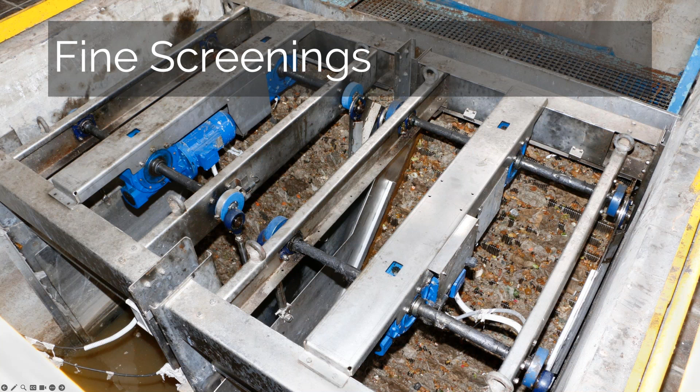We covered different kinds of equipment you can use for that, like what we're showing here, a mechanical step fine screen, but there are other options—wedge wires, perforated plates. We discussed grit removal there too, in simple grit channels, aerated grit chambers, cyclone separators, and the concept of grit washing and disposal.

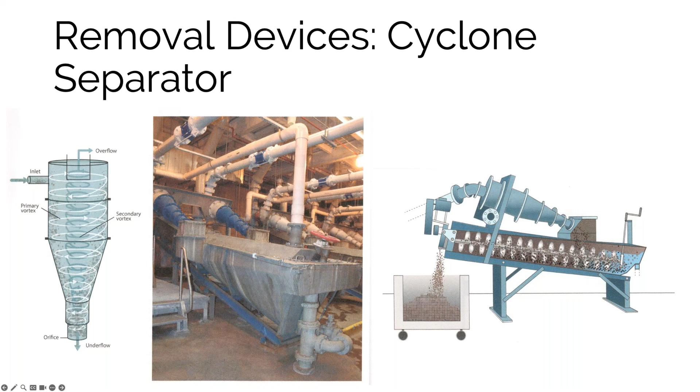I'm pointing these out specifically to let you know that these are not the solids we're looking for, to paraphrase Star Wars. When we're talking about solids handling in the context of wastewater treatment, this is not usually what we're talking about.

Part of the reason for that is the grit and screenings have their own disposal paths. They're typically cleaned—the screenings either go to a landfill or get incinerated. The grit, mostly sand and gravel and other inorganic matter, is also typically washed and sent to a landfill. There are environmental regulations and permit requirements about that, so definitely check your local listings about what you have to do with that.

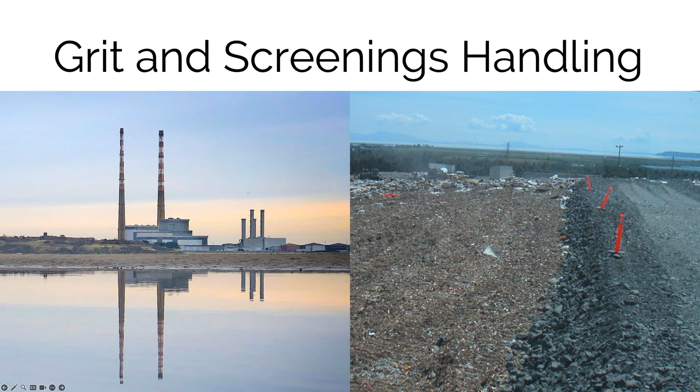If you're unfamiliar with these processes, we did a webinar a couple of months ago about this. The solids we're talking about in the context of solids management for these next two webinars, and generally when we're talking about solids management, are biosolids—basically the sludge.

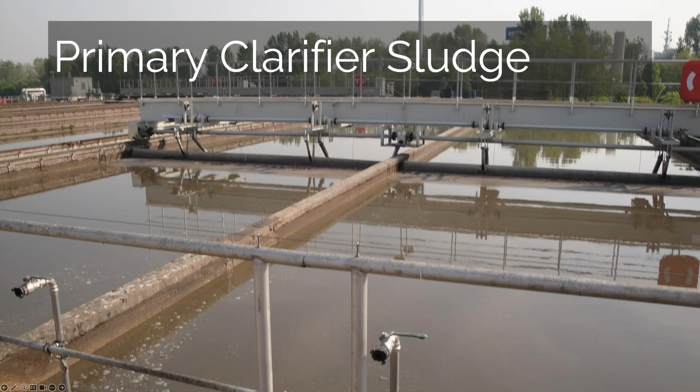We're using the primary clarifiers mostly for TSS removal, removing suspended solids. Tank shapes vary, but the principle is the same—we're essentially using gravity and engineering to get particulates to fall out of suspension so that we can collect them.

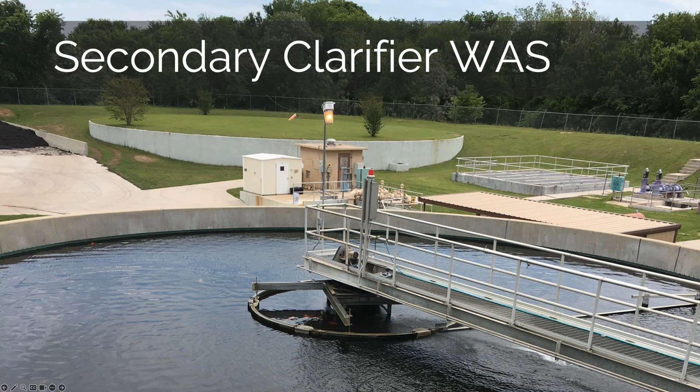Then we're talking about the WAS component of secondary clarifier sludge. Some of it goes back into the activated sludge tank. What we're not using is sludge that we have to deal with, and in this case, it's mostly biological floc and maybe some chemical floc if we're using chemical coagulation processes as well.

I want to point out that the concentration of solids in the WAS is typically much, much lower than primary sludge, but both have to be dealt with, because if you don't remove the sludge, the tanks fill up and your operations will cease to work efficiently.

So now that we know which solids we're talking about and where they're coming from, let's talk about where they're going. Assuming everything is working correctly and to spec in your system, most of the suspended solids and dissolved organic solids are going to be taken out of your effluent by your processes before it gets discharged into the environment. Particularly for large systems, that's a lot of solids that build up and have to be dealt with.

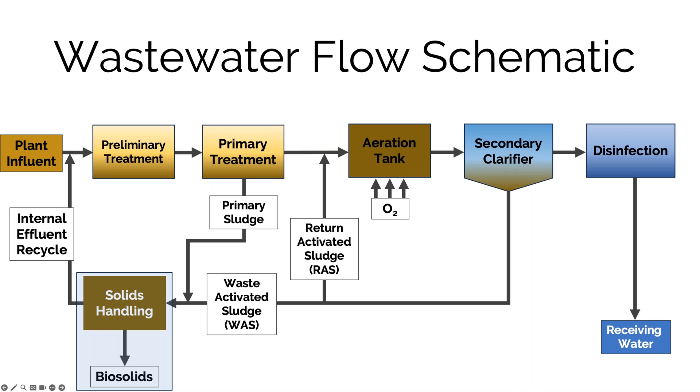Then it's going to move on to digestion, where we're going to do some more biological treatment and produce some biogas, which we may actually use in our processes. From there, it goes to dewatering. The effluent from that dewatering process typically gets recycled back into the plant for other uses, and then the solids that are left over get disposed of one way or another. We're going to leave that part of the equation for our next session.

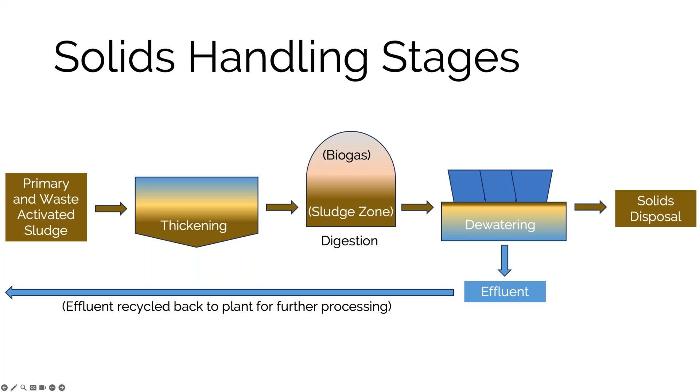So we've got 4 basic stages to think about when we're talking about solids handling. There's thickening, which is essentially reducing the volume of the sludge. There's digestion, which is further breakdown of the sludge with microorganisms, essentially a continuation of what's going on in activated sludge, but with different goals sometimes. Then there's the dewatering process after digestion, where we're removing more water from the solids, and ultimately we've got disposal or reuse, which is the end of the line for the sludge. There's a lot of different ways it can be dealt with.

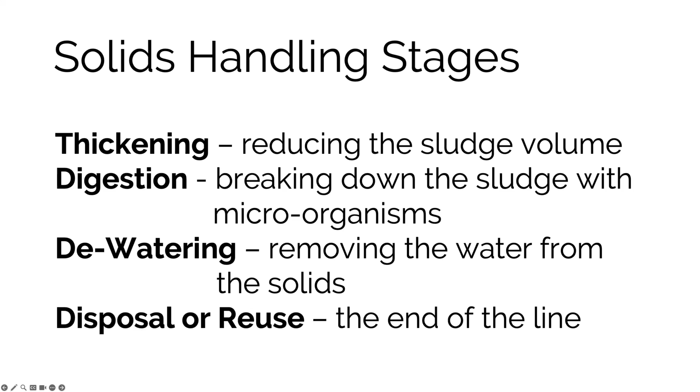There are many different options in each of these categories, but these 2 categories have a lot of similarities. Thickening and dewatering are essentially about volume reduction, using mechanical processes to do that. That's why we're focusing on what are essentially parts 1 and 3 of a 4-part process today, and leaving digestion and reuse for tomorrow, the November 9th session.

So let's start talking about thickening, and it's just what it sounds like. It's reducing the volume of sludge that you're going to store in a digester. This is typically step 1 after that initial solid separation process going on in our primary and secondary tanks. There are many different ways it can be done: gravity thickeners, centrifuges, dissolved air flotation, various kinds of belts and presses. But before we get into the mechanics of how we do this, I want to talk a little bit about the why.

As I said, this is a little bit more of a conceptual webinar today. So why is thickening necessary? Well, basically because sludge is mostly water. Primary sludge is typically somewhere between 95 and 97% water and only 3 to 5% solids. So if you do the math there, every pound of primary sludge is suspended in somewhere between 20 and 30 pounds of water.

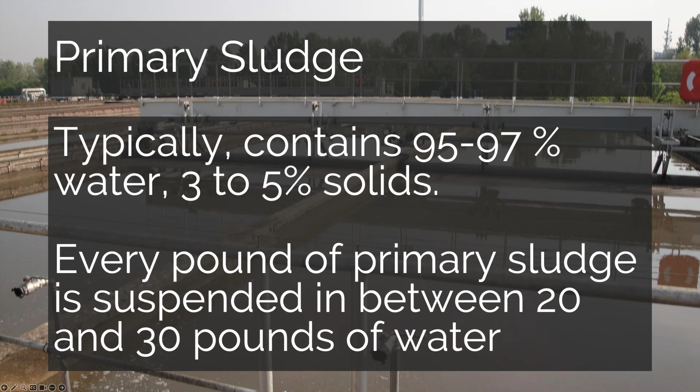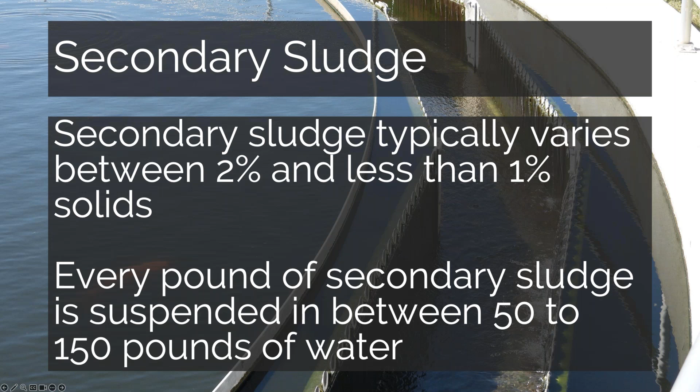On the secondary sludge, the ratios are even worse. You've got anywhere from 2% to significantly less than 1% solids in your secondary sludge. At the extreme end of that, you could have a pound of secondary sludge solids suspended in 150 pounds, or roughly 18 gallons of water. So if you didn't remove all of that water, the digestion equipment in stage 2 of your solids handling process would have to be at least larger, if not huge.

So one of the main reasons we go through these thickening processes is basically just to reduce the mass of the stuff we have to deal with in the later stages. There's a lot of advantages to this. By increasing the concentration and reducing the water, we can improve digester performance. If we have to retrofit a digester to an existing system, the smaller we can make it, the less it's going to cost. And another aspect that's often overlooked is that digesters are biological processes, and depending on the time of year and where you're located in the country, you might have to heat that digester to get it to work efficiently. Again, the smaller it is, the cheaper those heating costs are going to be.

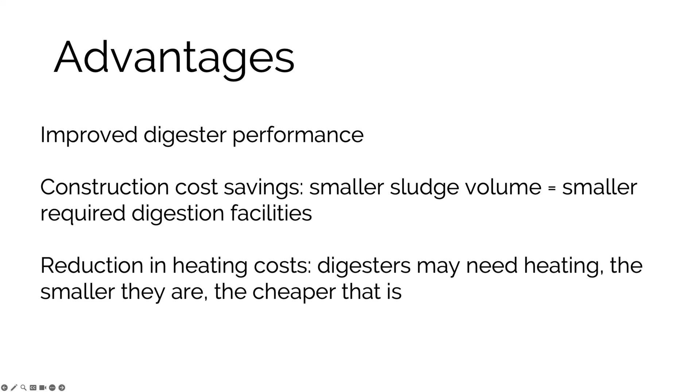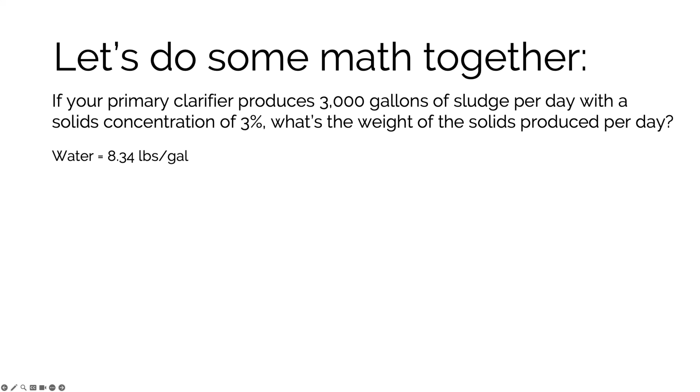So that's sort of some conceptual side things. I'm going to walk you through a little bit of math to really nail home what's going on here. If we've got a primary clarifier with 3,000 gallons of sludge producing a sludge concentration of 3%, we can figure out the weight of the solids pretty easily using a fairly simple formula: basically taking the sludge volume, multiplying it by the known weight per gallon of water, and then multiplying that by the solids concentration.

8.34 pounds per gallon is close enough for us to use in this situation. If we run the math through, double checking to make sure all our units cancel out, our 3,000 gallons of sludge is 751 pounds of dry solid sludge per day, which is pretty significant, but that's suspended in a relatively large volume of water.

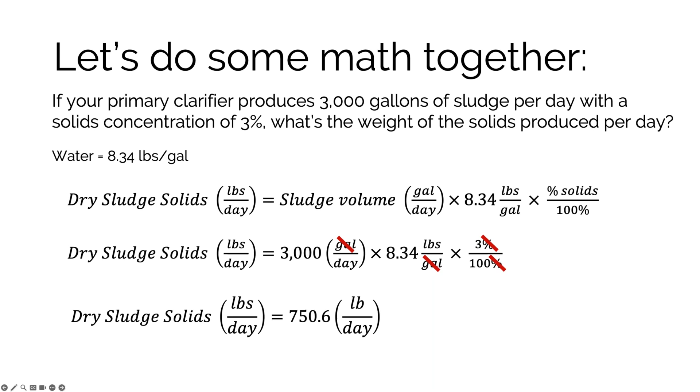If we wanted to up that concentration, let's say to 5%, so we're dealing with the same amount of solids, we're just trying to concentrate it, what does that do to our sludge volume? Well, we can use the exact same formula, just rearranging it with our known weight and kind of work backwards to figure out what the volume would be.

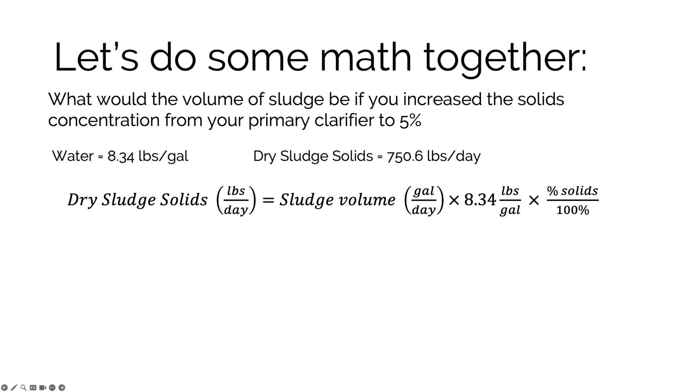So we take our same formula, we plug in our knowns, and in this case, we're looking for sludge volume instead of the weight of the dry solids. We work our problem backwards, rearrange it, and we've got our same weight of solids per day that we're producing, but in a higher concentration, and our 3,000 gallons has been reduced to 1,800 gallons per day.

So we've kind of done mathematically here what we talked about earlier. And what this shows is that small increases in sludge concentration can result in relatively large decreases in sludge volume, which is what we're looking for in our next stage of sludge treatment. So: small increase in solids concentration percentage, significant decrease in sludge volume.

You may be able to get the appropriate concentration of solids in your primary clarifier. You're probably not in your secondary clarifier, but you have to maintain each of those processes' operational parameters within the parameters they're designed for. So you may want thicker sludge coming out of there, but it might not be operationally possible. That's why you might need a thickener as an intermediate step between those sludge production processes and the digestion processes. So again, we just did mathematically what's going on in the thickening process, increasing concentration.

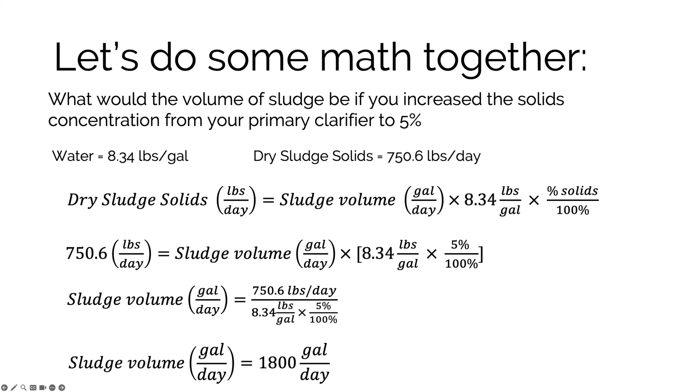So now that we know sort of the what and the why, let's get into the how. I'm going to start with gravity thickeners because they're one of the more common versions of these we see, and also because it uses a process you should be very familiar with if you were at earlier sessions, because it uses a sedimentation process.

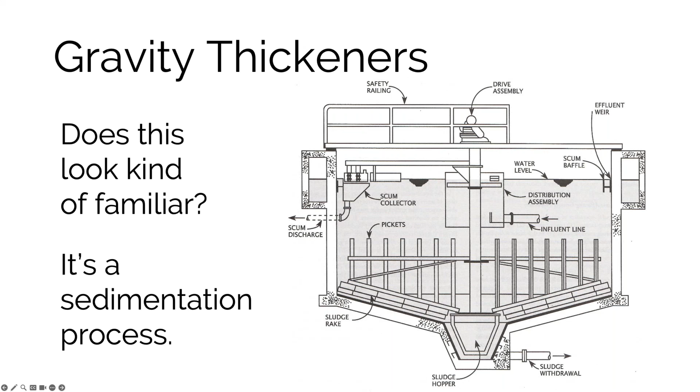It's essentially a different kind of clarifier with some slight tweaks, operated with slightly different operational parameters. It works on sedimentation. We did an entire webinar on sedimentation processes that I highly recommend you take a look at. But essentially what we're doing is slowing the effluent velocity down, using flocculants and gravity to settle those solids out, using clever engineering.

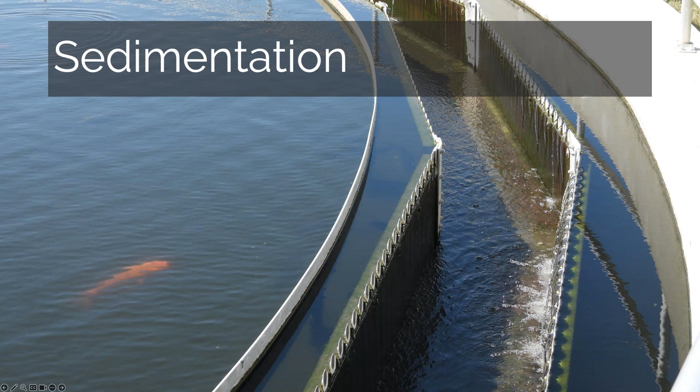And if you weren't at the last webinar, I kind of think of flocculated settling as an analogy to snowfall. If you think about a snowstorm up high, the flakes are separate, they fall, they clump together, they get bigger, they fall faster, eventually they land on the ground, and as they pile up, they start to act as a unit because they pack together and compress the snow beneath it. So that's essentially what's going on, on a conceptual basis, inside a gravity thickener. If you want to see what one of these things looks like and you've got a snow globe at home, shake it up and take a look at what happens, and that'll give you a good idea.

The components of a gravity thickener are really similar to what you see in another kind of clarifier. You've got an inlet distributor assembly, typically in the center. Influent gets pumped in. You've got a baffle that slows it down, that extends down into the surface of the water so that the solids start moving in the right direction. You've got a sludge rake on the bottom that's slowly rotating around, moving sludge that deposits on the bottom of the thickener into a hopper where it can be withdrawn.

Those rakes typically have pickets on them, so little fingers sticking up. Those are there for a couple of reasons. It helps with the flocculation because as it's slowly stirring, it's letting those flocs bang together and form larger flocs. It also helps release trapped gases that may develop in the sludge. Gases developing in the sludge are going to counteract settling. In bad cases, they can actually cause the sludge blanket to rise up in the system, which is the exact opposite of what you want to do.

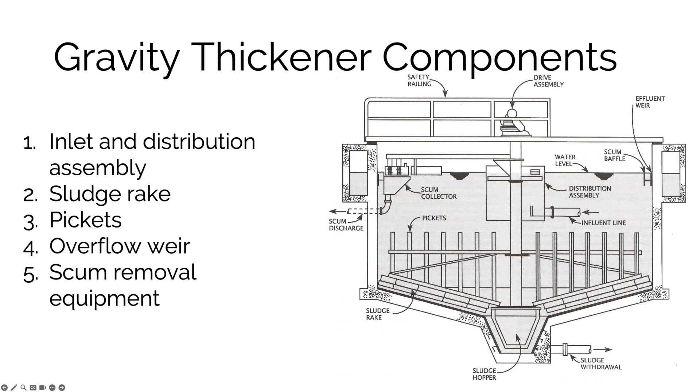Again, mostly on a conceptual level, sludge type is going to matter. The age of this feed sludge will matter. The temperature of the sludge that you're dealing with will matter. Remember when we talked about sedimentation, there are seasonal changes you have to deal with. Obviously, the sludge blanket depth is going to impact performance—how much solids you're holding in the tank for how long, which is essentially your solids detention time, but also hydraulic detention time and hydraulic loading are also going to play a factor.

We covered how to calculate detention time and hydraulic loading in a math-specific webinar earlier in the series, so I'm not going to go over those formulas today, but just recognize that these, like your other clarifiers, are parameters that you have to understand and know how to work with. If you're not familiar with how to calculate those, I highly recommend checking out the earlier webinar. But again, these are also all covered in your state and other resources available.

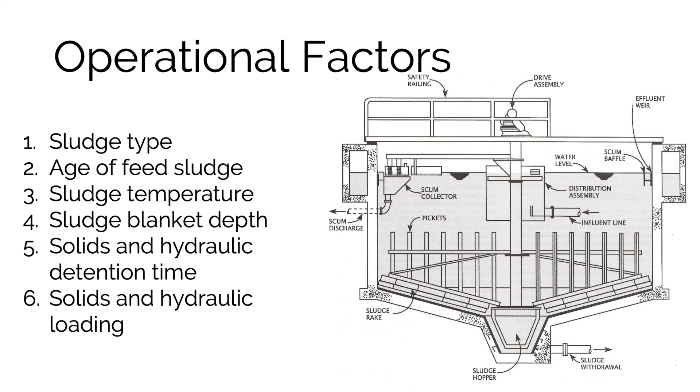So let's talk a little bit about sludge. Gravity thickening works best with primary sludge, typically because it has relatively high concentrations of solids in there. Fresh sludge typically can be concentrated to the highest degree, and part of the reason for that is that old sludge can get septic. If it gets septic, those anaerobic and facultative bacteria that may be living in there start to strip out oxygen and produce things like methane, hydrogen sulfide, and carbon dioxide, which form bubbles that get trapped in the blanket because it's semi-solid, and can lift some or all of it up.

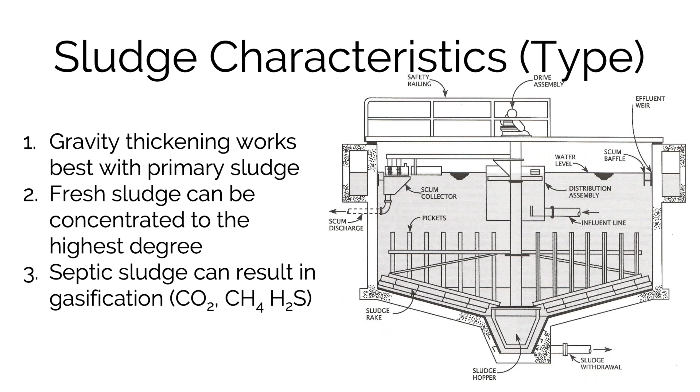You can theoretically use gravity settling for secondary sludge, but it settles much slower because it's a lot less dense. Another reason it settles slower is that the secondary sludge solids are mostly biosolids, so it's microbes, and they are 85 to 90% water, and that water is trapped inside the cells. So it makes the settling go a lot slower, and those solids in secondary clarification processes are also typically a lot finer, so they settle slower.

This is why, as we'll see in a little bit, particularly in smaller plants, quite often these two streams are merged together. So your primary sludge and your WAS get merged together to go into a single gravity separator, one that cuts down the cost of having two, but also makes the secondary sludge settling work better.

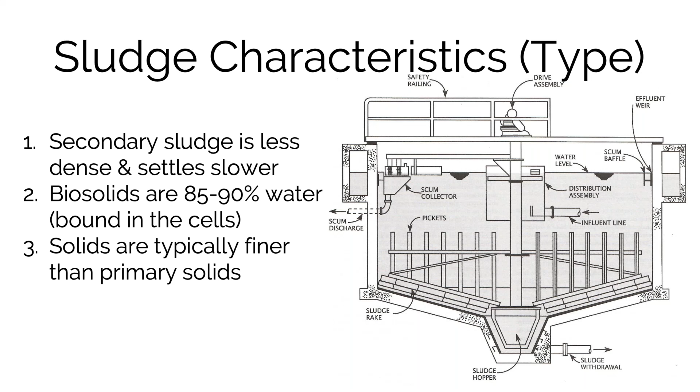Sludge age is also an issue, so that's going to be related to your detention time—how long it's been sitting in there, how old it was when it came out of the primary and secondary clarifiers to begin with. Again, if you hold the sludge too long, what dissolved oxygen is in there might get depleted. You can actually run into situations where you've got denitrification going on in the bottom of your tank, and a little bit might be okay, but a lot, again, can result in gasification, bubbles forming, and raising your sludge blanket.

Another issue that you might run into is an abundance of filamentous organisms. We talked about those in the activated sludge webinar. Old sludge tends to have more of them in there.

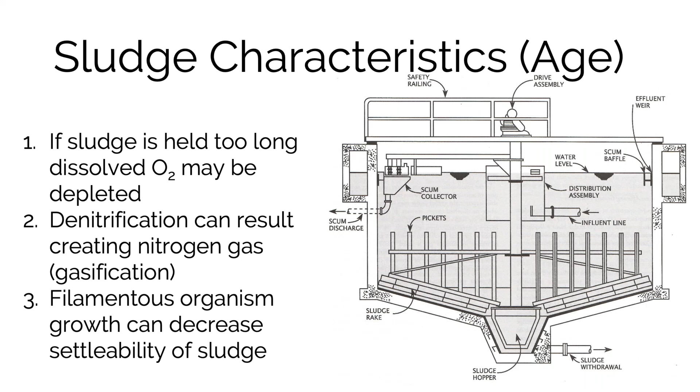Temperature, again, is another important factor to think about because there's still biological activity going on in here, and as sludge temperature rises, so does the biological activity, which is just another way of talking about some of the things we've already covered—gasification and sludge rising. This is why, typically, you will have higher sludge removal rates out of your thickeners in the summer versus the winter, because you're basically offsetting those increases and decreases in biological activity going on at the bottom.

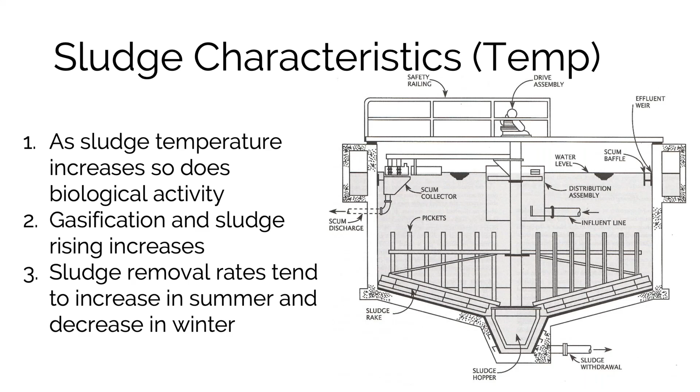So there are a lot of different designs of these. I'm just going to give you some general operational guidelines. There are many more factors to think about besides loading and thickening percentages. There are manuals like the SAC state books I talked about, and your state guides, that will have the required information, and your operation manuals for your particular system will tell you the ranges you're supposed to be working in. But typically, primary sludge solids loading rates are somewhere in the 20 to 30 pounds per day per square foot range, and the output sludge is about 8 to 10% solids. Activated sludge, on the other hand, has much lower loading rates and consequently much lower thickened sludge solids percentages. And that kind of makes sense if you think about it.

Most of your solids are coming out in primary treatment. A smaller volume of solids is coming out in that activated sludge process in your secondary clarifiers.

We talked about trickling filters during our fixed film webinar, so if you need some information about those, check that out. Trickling filters also produce biosolids that have to be dealt with, and they fall somewhere in between primary sludge and activated sludge, both in terms of operational loading rates and the thickened sludge that comes out.

As I mentioned earlier, quite often WAS streams and primary streams are combined into a single thickener, and you end up with combined sludge loading rates and thickening percentages, solids percentages, somewhere in between primary sludge and activated sludge by themselves.

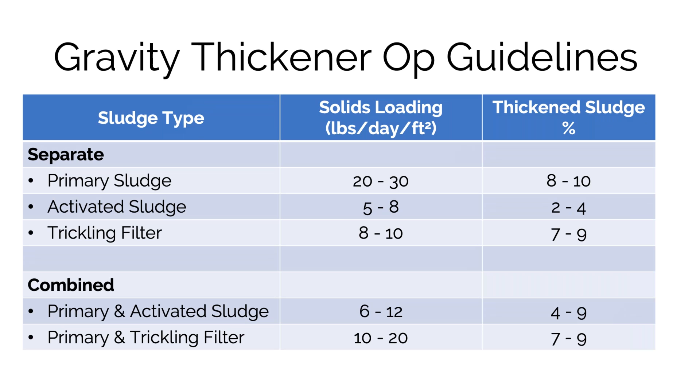Another thing you'll have to pay attention to is hydraulic loading rates. I'm not going to go over the calculation, we covered that in an earlier webinar, but I'll give you some typical ranges. Hydraulic loading rates in gallons per day per square foot for primary sludge are in the 400 to 800 range, activated sludge is typically about a quarter of that, and combined streams sort of fall in the middle.

You may have to mess with the hydraulic loading rates to make your system operate the way you want to. One of the ways that gets done is by blending secondary effluent with the sludge that's going into the thickener.

In addition to increasing the loading rates, this can also help prevent septic conditions and odors from developing, because you're essentially adding cleaner, more oxygenated water in there.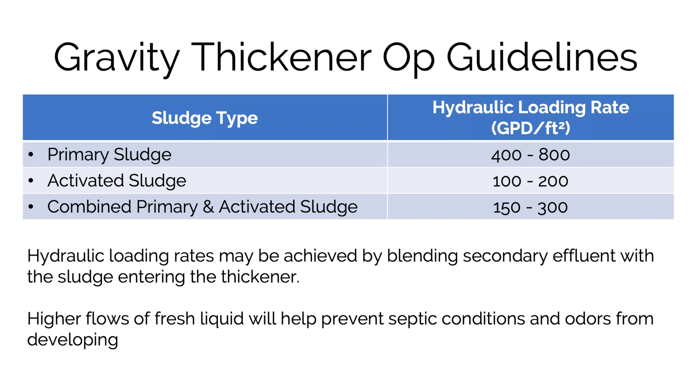So with that, we're going to get to our first poll question. It's a bit of a conceptual question based on the things I've been talking about. Basically, if you've got a gravity thickener and you're experiencing gasification and sludge rising, which of the following options might help correct that? Increasing sludge wasting to lower the sludge blanket depth, decreasing the sludge wasting to increase the sludge blanket depth, increasing secondary effluent recirculation into the thickener, or decreasing secondary effluent recirculation into the thickener. I'll point out that there are two right answers here.

We'll give you about a minute to think this out, and then we'll walk through what the correct answers are and how we get there. It looks like most people have their answers in, so I'll give everyone about 10 more seconds and then I'll close this poll.

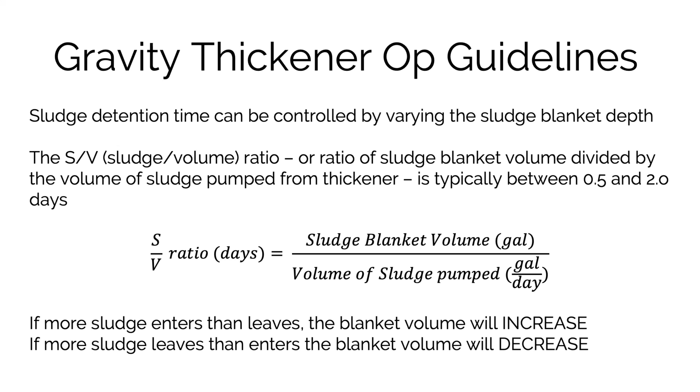So we've got our second little poll question here.

Let's do the setup for you. We've got a sludge blanket volume of 28,200 gallons. Sludge flow into the thickener is 100 GPM at 3%. Sludge flow out of the thickener is 40 GPM at 7% concentration. What's the SV ratio? Everything you need except for a simple conversion factor is there.

Remember, your SV ratio is in days and your flow is in minutes, so you're going to have to convert that. So take about a minute and see if you can come up with an SV ratio for this particular problem. I'll see you on the other side.

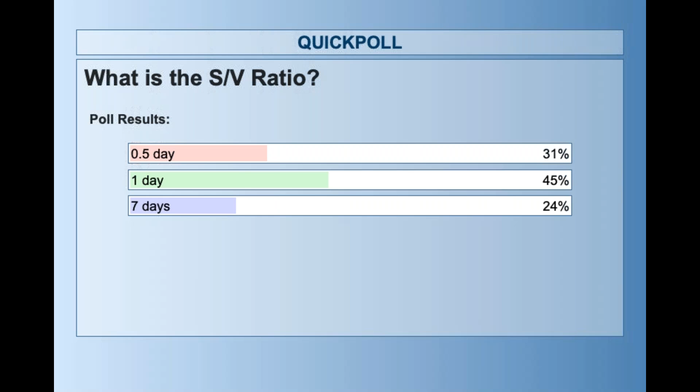All right, the answer here is actually half of a day. I will walk you through the math here to explain this. And I will point out that I did put a couple of red herrings in here just to make your life a little more difficult, but I'm trying to make a point with this.

To calculate this, what we need to know is the sludge blanket volume, which I've given you as 28,200 gallons. Then we have to figure out the volume of sludge that's getting pumped per day. What's going out of the thickener is 40 GPM, which we have to convert into gallons per day. So we use our 1440 minutes per day factor to convert that, which basically ends up with 28,200 over 57,600, which gives us half a day.

So I wanted to point out a couple of things. One, I simplified part of this problem and made part of it more complicated than it needed to be, because this is often the kind of thing you might see on a test. Sludge blanket volume, again, I gave you here on an op cert test, but you're often going to have to calculate that. They'll tell you what the sludge depth is, and then you'll have to use your pi r squared or pi over 4 times diameter squared formulas to figure that volume out.

The other thing to point out is that in the context of this particular question, concentration does not matter. So if you picked one, you probably actually flipped the ratio upside down—instead of dividing the volume of the blanket by the volume of sludge, you flipped that equation and ended up getting 1. So make sure you're putting the right things in the right places. If you picked 7, you probably multiplied the concentration of the output into the bottom line, which threw you off.

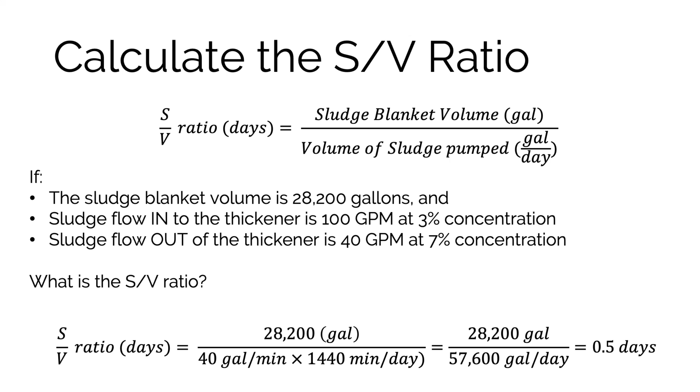This is again one of those parameters that you're going to use, and it's going to vary based on the design. If you have one of these systems, it's really good to understand what your engineers decided your system parameter should be, what range it's supposed to be in, so you can dial that in accordingly. Another parameter you're often going to look at with thickeners, similar to other kinds of clarifiers, is removal efficiency.

So we've got another problem here, and in this case, the concentration does matter. This is a typical efficiency formula where you're looking at, in this case, not the sludge going out, but the influent in, so the sludge coming in and the effluent out.

So in this case, we've got 30 GPM going into a thickener at a 3% concentration, which is 30,000 milligrams per liter, and an effluent flow out of the thickener at 0.15% concentration, which is 1,500 milligrams per liter. Take those numbers, throw them into that formula, and see if you can come up with the removal efficiency for this set of particular parameters. Kristen, if you want to throw the answers up there.

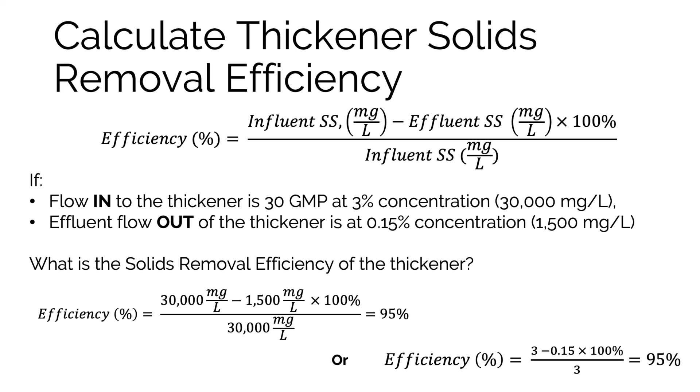Other thickening methods that typically get used are DAF, which is dissolved air flotation, centrifuges, belt filtration, and drums.

I'm going to start with flotation because it's kind of the exact opposite of the gravity process we talked about just now. In gravity thickening, we're using physics to push the solids to the bottom of the tank where we can collect them. In a flotation process, we're using physics to push the solids to the top of the tank. It's kind of a neat process. This is a cross section of what a DAF unit typically looks like.

You'll have sludge and polymer coming in at one end, usually at the bottom, and it gets mixed together and released into the basin. Part of that sludge feed is air bubbles, which causes the sludge to cling to the outside edge of the bubbles and rise up, where this mechanism at the top, which is essentially a bunch of scraper blades, rotates and slowly moves the sludge off the top to one end where it can be discharged, while the clarified effluent, which you can see going out the bottom under a weir, goes out the other end.

So it's the same net effect as gravity separation, but we're working in the opposite direction. Although, of course, some sludge is always going to settle to the bottom, so every DAF unit I've ever seen or read about has a bottom sludge collector for the little bit that ends up down there. And I do want to point out that they can be round like regular clarifiers, or they can be rectangular like what I'm showing you here.

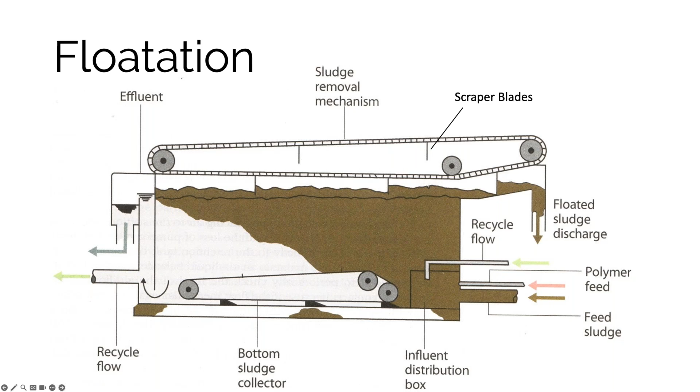Flotation is used in a lot of different industries: wastewater, food manufacturing, mining, all sorts of things, and there's a lot of different ways it can be done. You can use dispersed air flotation, where you're generating bubbles using mixers or diffused aerators. You can use biological flotation, which is essentially just letting the gases that biological activity creates float the solids. You can use dissolved air vacuum flotation, where you're essentially aerating the effluent at atmospheric pressure and then putting it under a vacuum, which causes bubbles to get released. Or you can use the more typical process used in wastewater, which is dissolved air pressure flotation, where you're essentially aerating the effluent under pressure and releasing it to atmospheric pressure.

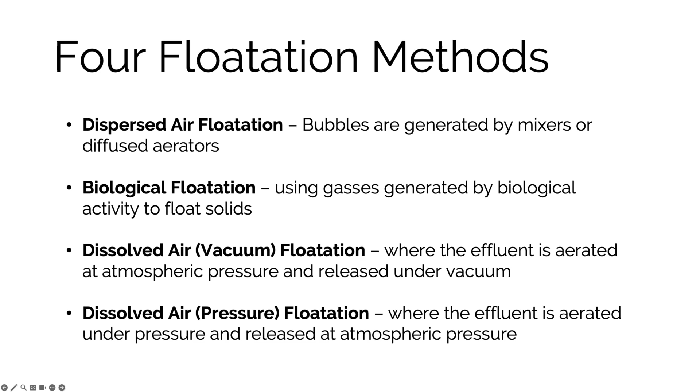And the mechanism that's at play here, every one of us has seen, even if you don't know it. It's exactly what happens when you open up a can of soda. The liquid inside the soda can has gas dissolved in it, and it's under pressure.

And when you crack the seal, you're basically exposing it to atmospheric pressure, and the CO2 that's dissolved in the liquid effervesces out. It basically forms bubbles and comes out because of that pressure change. And so that resulting foam you get is what happens when a liquid that's saturated with gas under pressure is released to atmospheric pressure.

It's also somewhat similar to what you see divers have to deal with. So the deeper they go, the more nitrogen gas in their bloodstream gets dissolved into the bloodstream. And if they ascend very, very quickly, so if the pressure changes very quickly, that dissolved nitrogen gas actually bubbles out in your blood and causes the bends.

Same physics going on, but in the case of wastewater treatment, we're essentially using the creation of those bubbles to float solids to the surface, because the solids stick to the outside surface of the bubbles.

There's three different typical flotation methods that get used: full flow, partial flow, and recycled flow pressure flotation. In a full flow system, you basically are pressurizing the entire stream of influent flow before you release it into the DAF unit.

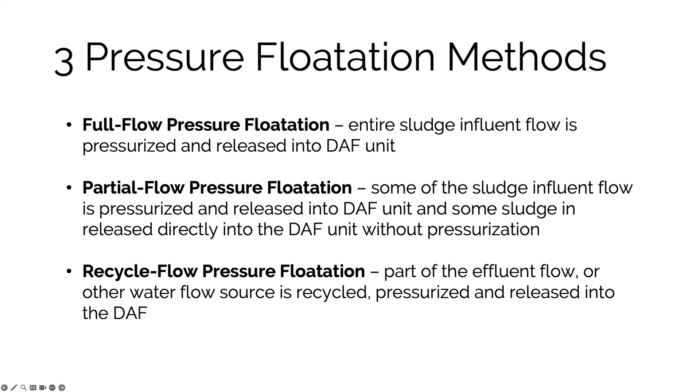If you don't have mixers in there, you can get saturation levels of around 50%. There are typically mixers in these because if you've got a mixer in there, you can actually get the air saturation up to around 90%.

And the detention time is going to vary depending on the design. It could be anywhere from as short as 30 seconds to as long as 30 minutes, depending on what kind of setup you've got. But that saturated air liquid solution goes through a pressure reducing valve and gets introduced into the sludge feed as it's moving into the flotation unit.

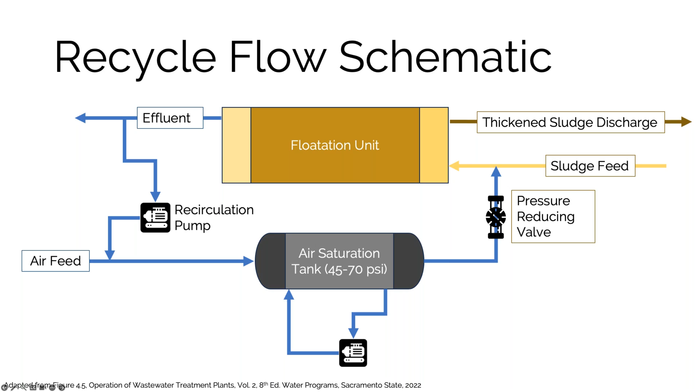So effectively, like I said, you're opening that can of Coke in the sludge feed line, the bubbles form, and as they form, they rise the solids in there to the surface, and it looks something like this.

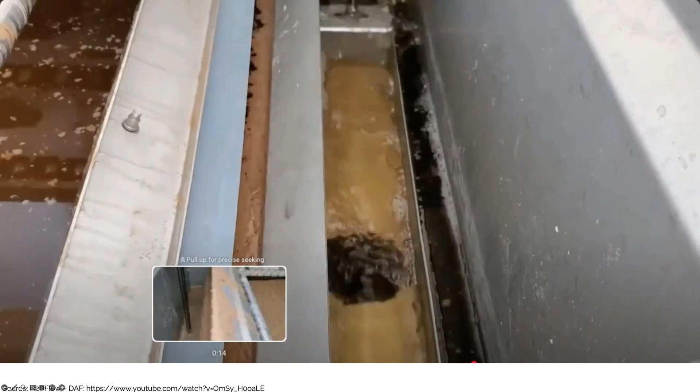And in just a second, you'll see the other end of the machine where it shows the very clear effluent going out, some of which is going to be recycled, some of which is probably just going to go up to the front end and move through the entire system again. So that's what one of these things looks like in practical terms.

They vary in size, they vary in shape. This again happens to be a rectangular one. There are round ones as well. There are a lot of different designs, so there are a lot of different parameters you have to pay attention to.

One of them is the air solids ratio, which is kind of unique to this particular situation. And this is a technically unitless ratio where you're tracking the amount of air versus the amount of solids that you're putting into the DAF unit.

If you've got 100 gallons per minute of WAS with a concentration of 9,000 milligrams per liter going into your DAF unit, and you're moving air in there at 5 cubic feet per minute, you can figure out the AS ratio. Again, the ratio that your particular system is designed for will be given to you. By doing something like this. The key to knowing this is knowing the density of air.

So we've got a flow of air, 5 cubic feet per minute. There are tables you can use to look up the density of air, 0.075 pounds per cubic foot. So for every 5 cubic feet of air we've got, that weighs 0.375 pounds.

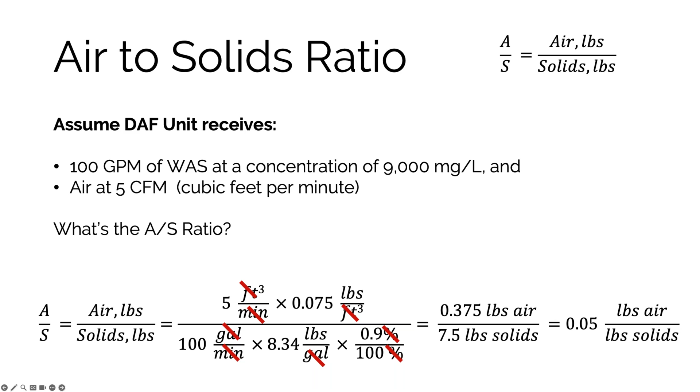There are some operational guidelines I can talk about, and those relate to what you can do with polymers and what you can do without. You often use polymers in DAF processes, not always, but you can see what the differences are here.

The minimum influent solids concentration is going to be the same. Same thing with the air solids ratios. Those ranges are the same, as are the recycle rates, or the amount of water we're moving back through that air feed. But you can get significantly higher solids loading rates if you're using polymer, and slightly higher hydraulic loading rates, because it helps that bubbling, sticking action, raising everything to the surface. Also, polymers give you significantly higher solids recovery rates.

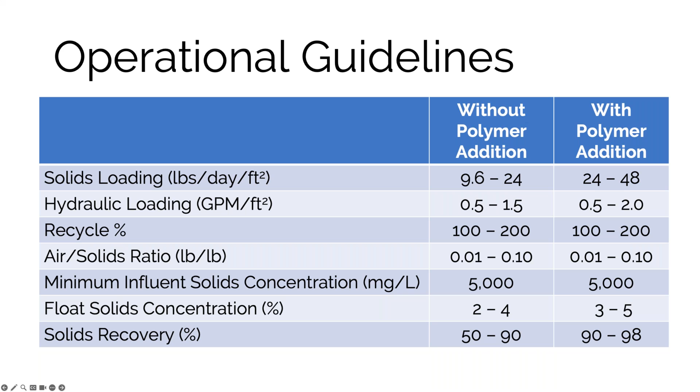DAF units, like everything else, have some issues you might have to deal with. Typically what you're looking at is the thickness or thinness of the float blanket and the quality of the effluent coming out. If your float blanket is too thick, one of the things you might do is check the solids loading, maybe lower the flow rate, or increase the speed of those scrapers moving across the top. Those can all be controlled independently.

Same line on the other side. If you've got a float blanket that's too thin, you might slow the flight speed down so that more is allowed to build up there.

Then, depending on what's going on with your float, you might have to look at your AS ratio, look at the air input, look at compressors, because you're relying on that pressure differential. So if your compressors aren't working right, or the cycle times are incorrect, or the loading's excessive, you may run into operational problems. But again, if you've got a system like this, you should have an operations manual.

And if you grab those Sac State books or look at your state materials, they will lay out the basic information, troubleshooting information that you're going to be responsible for on a test.

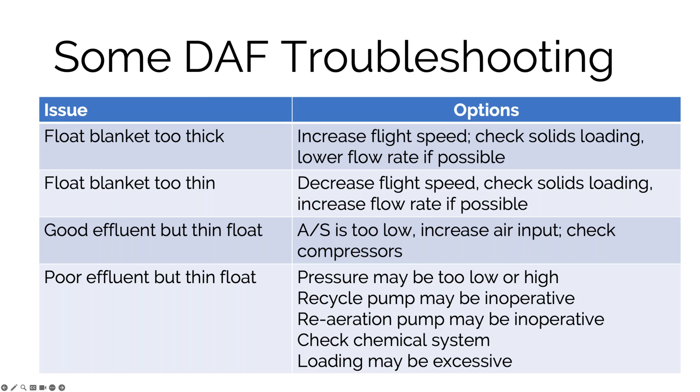There are also centrifuges that we use for this process. And if you've ever seen a washer, you've seen a centrifuge at work. Basically, it's analogous to the spin cycle in your washer with some fancy engineering. And just like washers, there are centrifuges that spin on a horizontal axis and some that spin on a vertical axis. I've got a couple of videos I'm going to show you here really quickly.

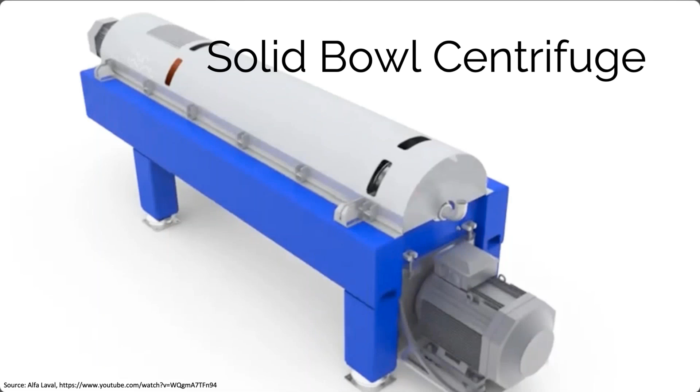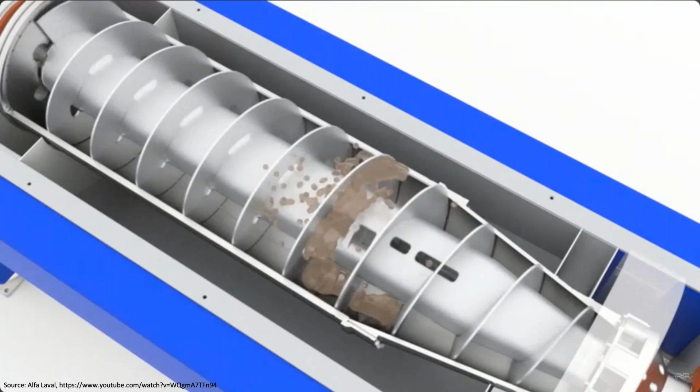This shows a solid bowl centrifuge at work. This is one of the more typical versions you'll see in a wastewater treatment plant. Actually, they're probably the most widely used. They're continuous feed processes. We've got a horizontal bowl that's kind of in a cone shape that rotates on its axis at really high speed, typically somewhere between 400 and 1,000 RPMs. Inside the bowl, there's a rotating screw conveyor moving in the same direction as the bowl, but at a lower speed.

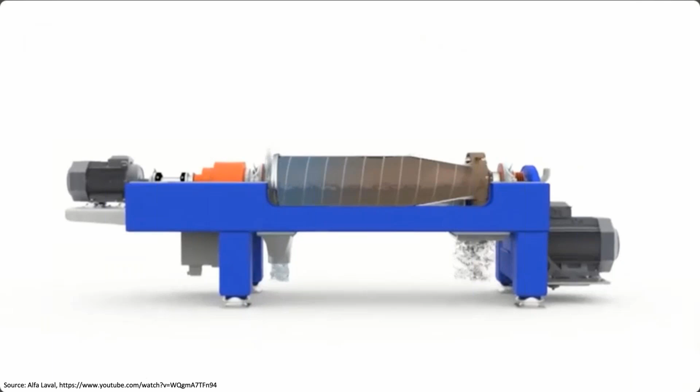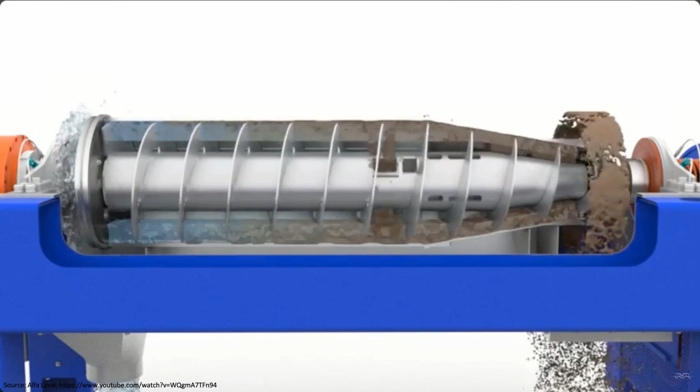Sludge gets fed through the inside of the unit and comes out of that rotor somewhere in the middle, and the centrifugal force of the spinning components forces the sludge out to the outside through the liquid pool, where it gets compacted along the outside edges. Then the screw moves the solids toward one end, which you can see splatting out on the right-hand side, while the liquid goes out the other end. So the net effect is solids settling through the pool of liquid, getting compacted and conveyed where it exits as thickened sludge, while the centrate, the liquid that's been centrifuged out, exits the unit at the other end.

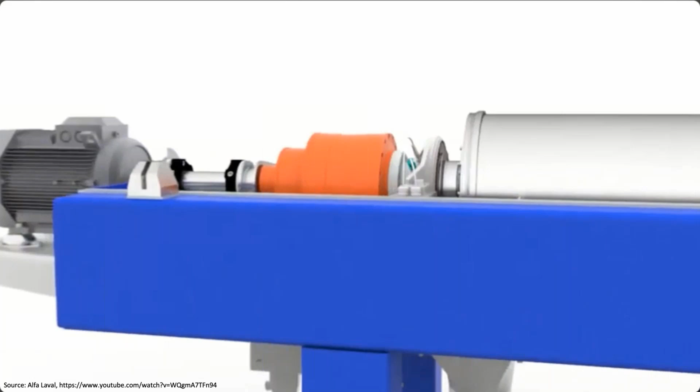We also have belt thickeners. These are derivatives of belt presses that are used for dewatering. With this option, we're essentially using gravity and a porous belt to... sorry, my video is not working here. I apologize for that.

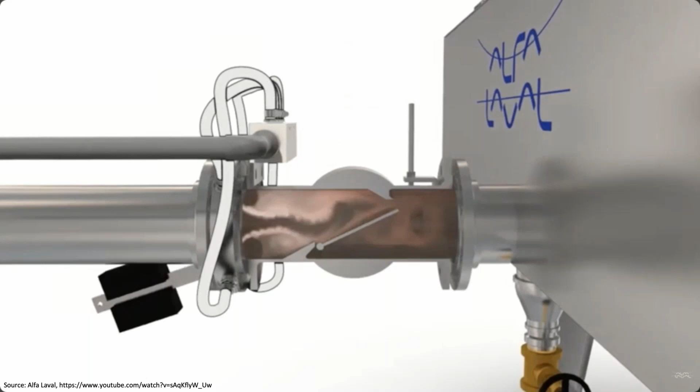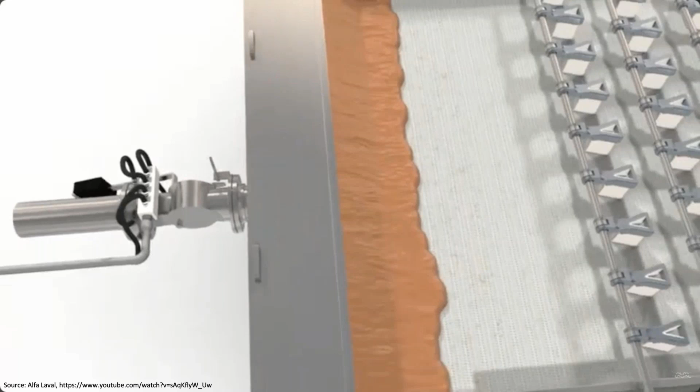Basically what we have is polymer and sludge being fed into one end, distributed along a belt. That belt has little plows in it that create furrows, which enable the free water to drain out through the bottom of the belt. The sludge goes across the top, gets collected at one end, while the liquid flows through the porous belt out the bottom and is collected and dealt with. So this is those plows at work - by creating the furrows, it concentrates the sludge and provides the water additional paths to drop out of the bottom of the belt.

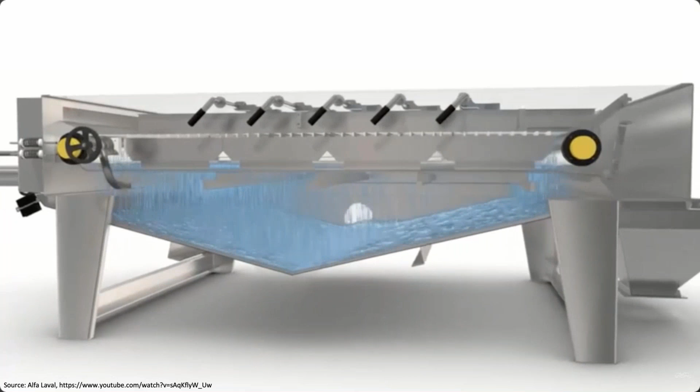There are a lot of different designs of these, used in a lot of different industries. There are different belts with different porosities depending on the kind of sludge you're dealing with and how thick it is. These work very well. Typically in size they range from maybe 3 to 10 feet in width. The sludge gets collected at one end and goes out in a hopper, then moves on to our next operation, which is digestion.

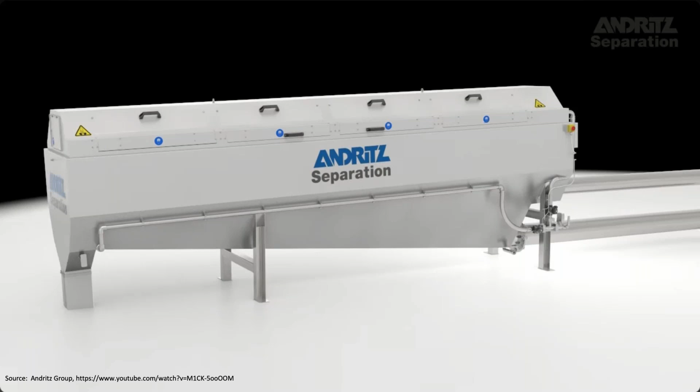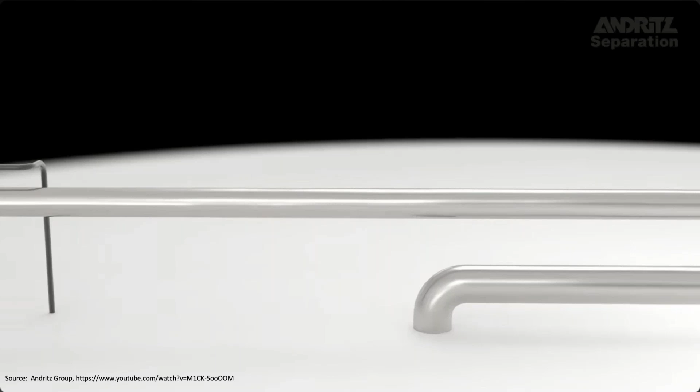There are also drum thickeners, and as you see these videos, you'll realize they're all just variations on a theme, different ways to get water out of the sludge. With a drum thickener, it's a slightly different setup. You've got an angled porous drum that is rotating, typically at a much slower speed than the centrifuges. Again, typically there's polymer added at the input stage. That polymer and sludge gets mixed together, which helps the solids bind. Then as it moves through the drum thickener, which spins around in circles along an almost horizontal axis, water drains out through the bottom, through the porous outside edge, and the plates inside essentially convey the increasingly dewatered sludge from one end to the other, where it gets dumped out and moves on to the next process.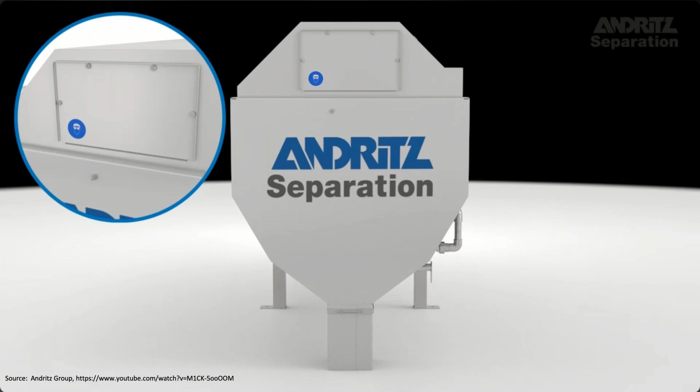We'll see that here in just a second as our little sludge gate opens up. You can see they turn relatively slowly here, because we're basically letting gravity do all the work. With a centrifuge, we're adding energy to spin the water out. Here, gravity's doing most of the work. So a bunch of different kinds of thickeners.

Here's a brief table comparing the types used and how often they're used. Gravity thickeners are typically used for either untreated primary sludge or a combined flow of primary and WAS. Theoretically you can do it for WAS by itself, but it isn't done very much because it does a poor job of concentrating the solids. DAF units are not typically used for both streams - they're more common just for WAS, but they're expensive to run, so their use is decreasing over time.

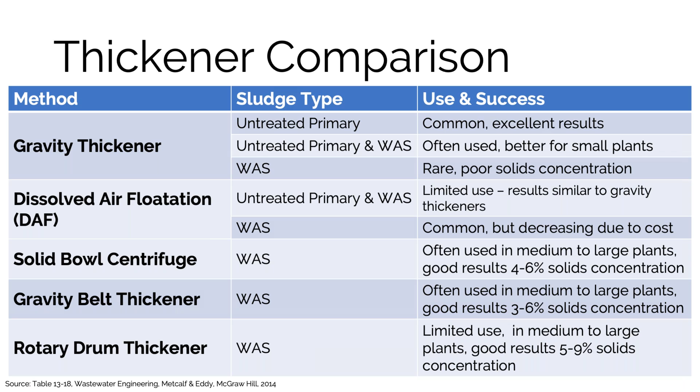The other kinds we showed here are typically used for WAS, typically in large to medium plants, and they all have pretty good solids concentration. Of course, the next step is digestion, but we're skipping that because that's the topic of our next webinar.

You're probably wondering, I talked about thickening and digestion, and here we are almost at the end of the webinar, and I haven't talked about dewatering yet. That's because dewatering uses a lot of the same processes. So it's all about volume reduction. We use some of the same kinds of techniques to do it.

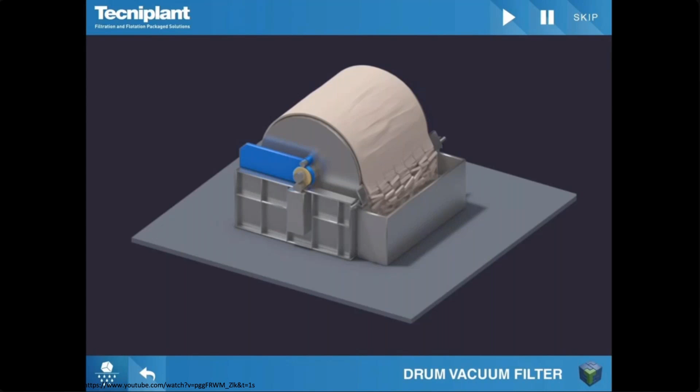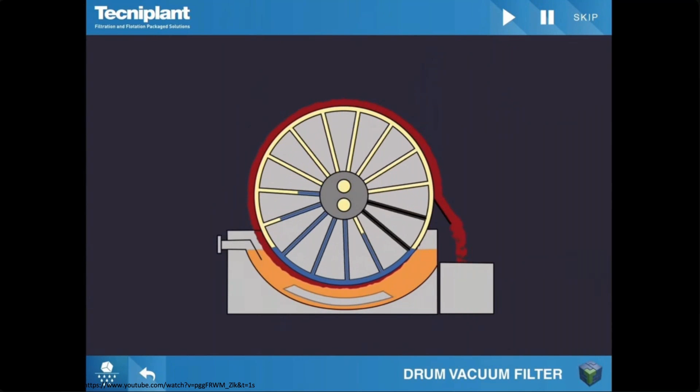One option is a vacuum drum filter, which is kind of like the last thing we saw, but in reverse. Instead of the sludge going on the inside, the sludge goes on the outside. You'll see a cross section here: the sludge and polymer go into the bottom of the tank. This spinning drum has a vacuum in the middle, so it sucks up liquid. The solids stick, it sucks the liquid out as it turns, and on the other side of its rotation, the now dewatered cake gets scraped off. The main difference between thickening and dewatering is that in dewatering, you've got much, much more dry solids.

Belt filter presses - this is one you've probably seen in other videos of ours, down in Antarctica. They come in a variety of sizes. As I said, the gravity filter belt for thickening is just a derivative of this. If you look at this particular unit, the part in the middle of the page is actually a thickening belt setup followed by a press setup.

The main difference between these is that in a belt press, you've got 2 belts instead of just 1, and you're using gravity in the first place to dewater, then squeezing those solids between 2 porous belts through a bunch of rollers to get the rest of the water out, or most of it. These are really, really common.

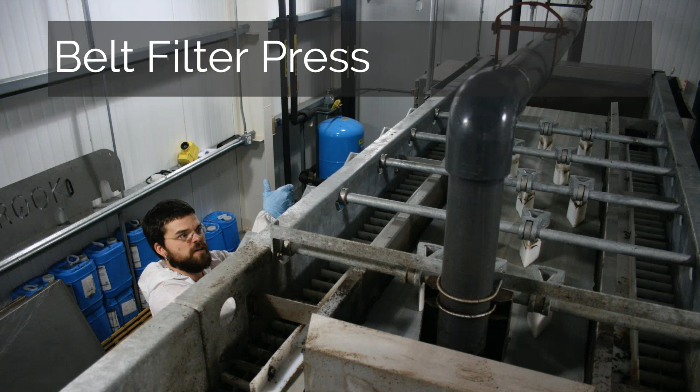They're all over the place. This one happens to be in Antarctica because they have to deal with wastewater down there too, and you can see the plows sort of in the gravity dewatering process, and the rollers underneath. So this is what one of these looks like in action.

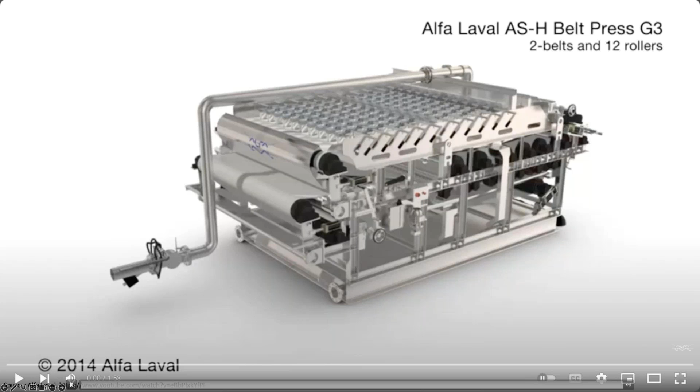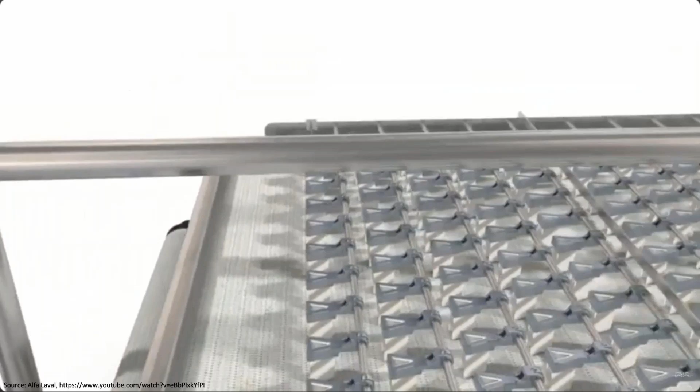Quick video, same sort of process. Polymer being added at the beginning to help with the dewatering process, distributed over the belt. In this case, we've got kind of a 2-stage process where we've got what's effectively a thickener at the top, and this part looks exactly like what we've looked at before. Then after this gravity thickening piece, the resultant thicker sludge gets squeezed between a set of belts and rollers so we can get a much, much drier cake as a result.

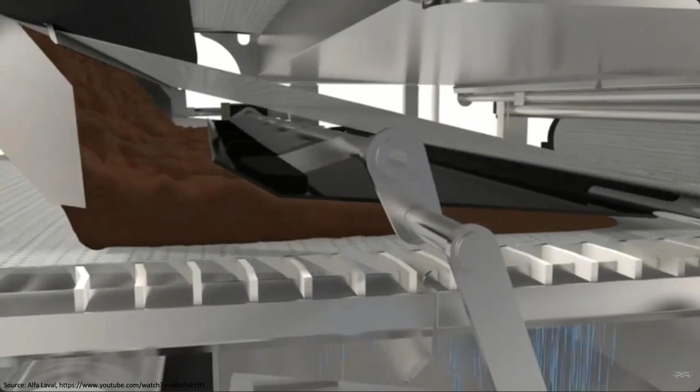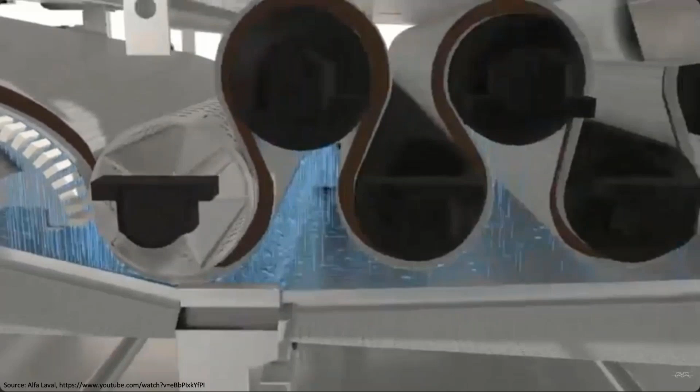Here we can see the bottom end gets dropped on a belt, you can see it wedging, and then it runs off to a different set of rollers. They vary in size - there may be 3, 4, 5, 12, 15 rollers, depending on how big your system is. The net result is, in addition to letting gravity pull free water out, we're using that squeezing action between the 2 belts to essentially wring what's left of the water out of the system and give ourselves a bunch of dry cake at the end, which we can then use in disposal.

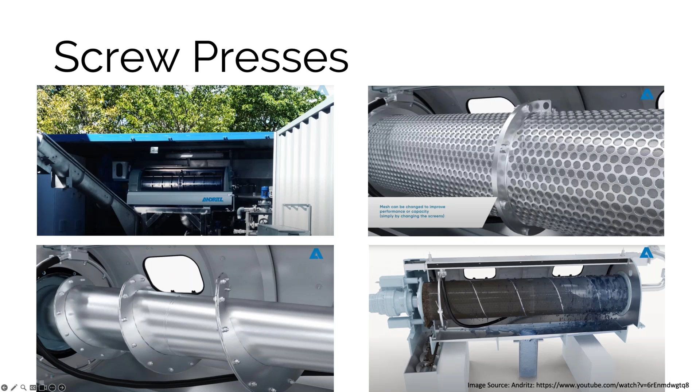There are other technologies I'm not really going to talk about - they are variations on a theme. There's screw presses that look like this, essentially rotary mechanisms that work slightly differently but do the same thing, using squeezing action to squeeze the water out. We also use solid bowl centrifuges and basket centrifuges for the dewatering stage as well, so you might have the same kinds of equipment at the dewatering stage as you had earlier at the thickening stage. You're just operating them at different parameters to get drier cake at the end - same concept, slightly different output, basically thicker solids concentration.